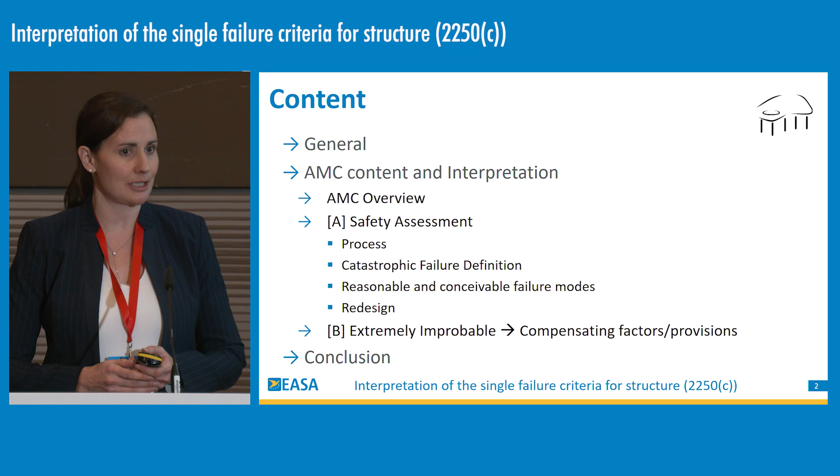I'll start with a general introduction to the requirement itself and the reason behind it, and then introduce the AMC material, giving an overview of the process to show compliance to the requirement. The AMC material is split into two parts. Part A, the main part to show compliance, includes a safety assessment. I will also explain Part B, which asks for an extremely improbable demonstration using compensating factors and provisions, and I'll clarify when Part B can be used. I'll finish with a concluding summary.

As a reminder of the requirement, for category enhanced only, a single failure must not have a catastrophic effect upon the aircraft. This failure is both at aircraft level and occupant level. So if a single failure is unsafe for all the occupants, but the aircraft survives, this is also a catastrophic failure. I also want to highlight that this requirement is a design requirement, and what we want to ensure is the aircraft is designed to be robust against single failures.

We do accept that this is a very challenging requirement. It's a new requirement, not part of CS 23, 27, and 29. But the unique design of the VTOL aircraft makes this objective achievable.

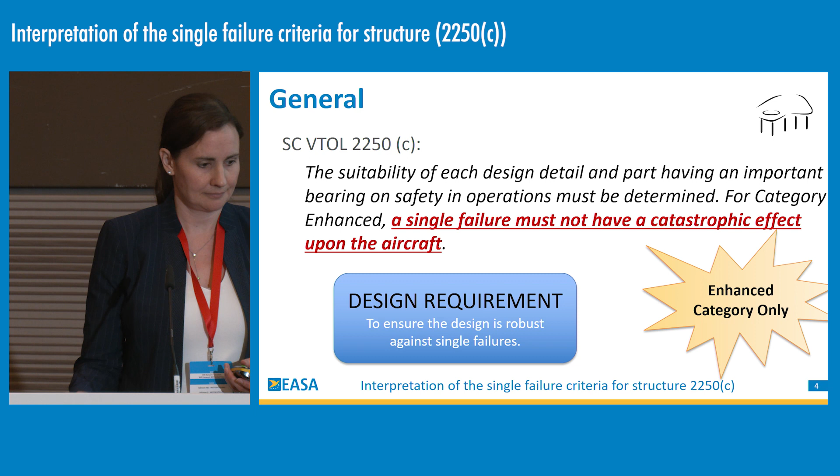Here I show a few examples of the VTOL designs that we covered under the special condition. The key design concept I want to highlight is the use of multiple lift thrust units. Due to these multiple lift thrust units, these VTOL aircraft can be designed to be less sensitive to catastrophic failures, because sufficient segregation and redundancies can be incorporated into the design. This makes our key objective, no single failure leading to catastrophic effect, achievable.

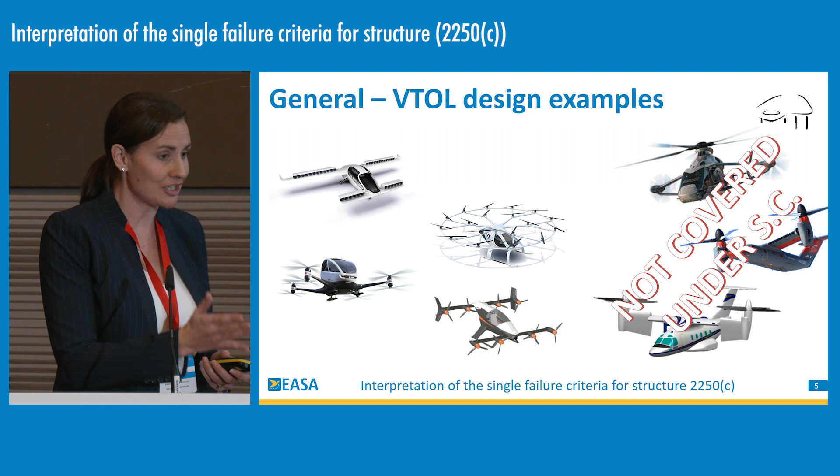As a reminder, the special condition is only applicable to aircraft with more than 2 lift thrust units used for takeoff. The examples on the right-hand side are not covered by the special condition, as it's accepted that meeting this objective would be significantly challenging for these types of aircraft.

In other words, the enhanced VTOL configuration is unique compared to rotorcraft and aircraft. With the multiple lift thrust units, VTOL is less sensitive to catastrophic single failure, provided that sufficient segregation and redundancies are included in the design, the structure, the lift thrust units, and their installation. This is our unique opportunity to make single failure not catastrophic achievable. Even with all the precautions we currently have with CS 27 and 29, unfortunately in service we still have catastrophic events from single failures. This is our chance to design against it.

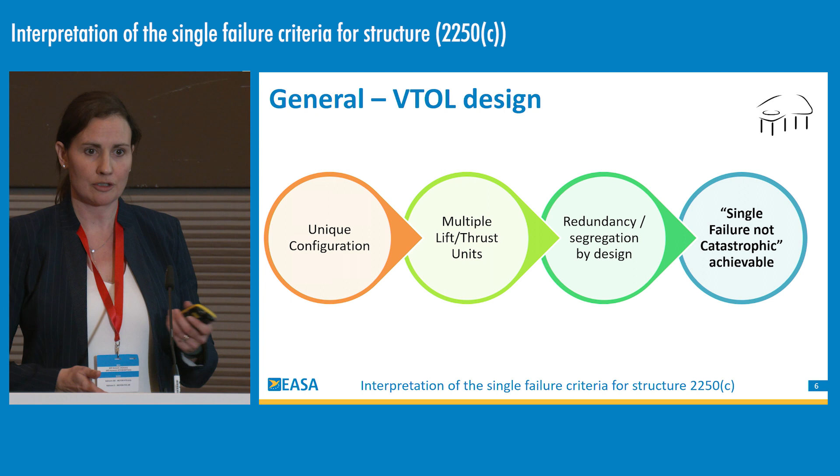So far I've been concentrating on the multiple lift thrust units. Clearly the airframe design is not a new concept compared to rotorcraft. But with the use and consideration of multi-load path and crack or damage arrest features, single failure not catastrophic can also be achieved for the whole of the structure, including the airframe, control system, and lift thrust units.

Now we'll move on to the AMC, the guidance material overview, and our interpretation. On this first slide, I'll just give an overview, but I'll go into more detail on the subsequent slides.

So the process starts with a safety assessment, and this is Part A of the AMC. If the result, when you've considered all reasonable and conceivable failures, is that no single failure would lead to catastrophic consequences, the requirement is met and the objective is met. If this is not achieved, we will request redesign or reconfiguration. And this redesign or reconfiguration loop should be repeated until the objective is met.

However, we do acknowledge in some cases this objective may not be possible to achieve. If the redesign options or reconfigure options are impractical, add excessive complexity, or add additional potentially catastrophic failure modes, we can move to Part B. But Part B will be accepted only on a very limited case-by-case basis. It must be discussed with EASA, agreed with EASA, and documented. Again, I'll give more information later in this presentation.

So the safety assessment process is very standard. Firstly, all the parts to be considered must be identified together with their functions. A functional hazard assessment should identify all the catastrophic failure conditions, taking into account all the foreseeable operating conditions, such as temperature, altitude, vibration, operating limitations. Then an FMEA should consider all the reasonably anticipated failure modes, with the objective to show that no catastrophic consequence results from a single failure. As a reminder, this is a design requirement, so the FHA and the FMEA should be performed during the conceptual and initial design phases of the system and structure, taking into account all potential failure modes so that the proper provisions or redesign can be made to eliminate the catastrophic failures or consequences.

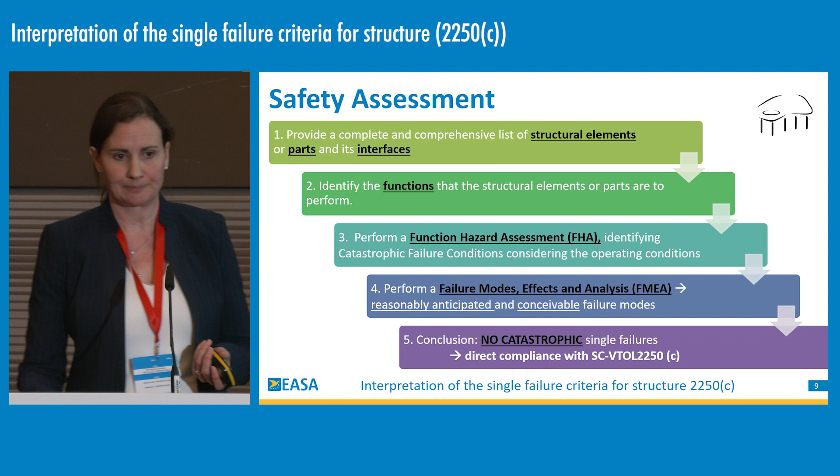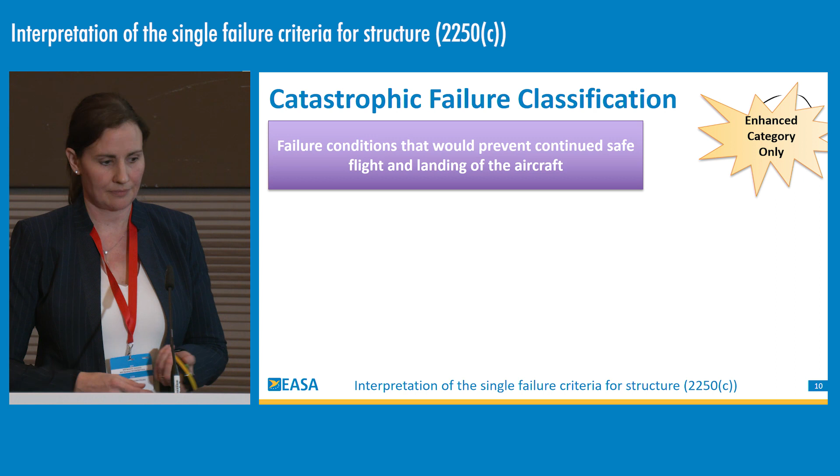So to clarify what a catastrophic failure condition is for this case, for enhanced category only, catastrophic failures are those that would prevent continued safe flight and landing of the aircraft. Not only do you need to consider the residual strength of the remaining components, but you also need to consider other parameters such as flutter, controllability of the aircraft, the fatigue loading on the remaining components following load redistribution to ensure you can continue the flight and land, the resulting vibration levels, and also the functionality and performance of the aircraft following the failure.

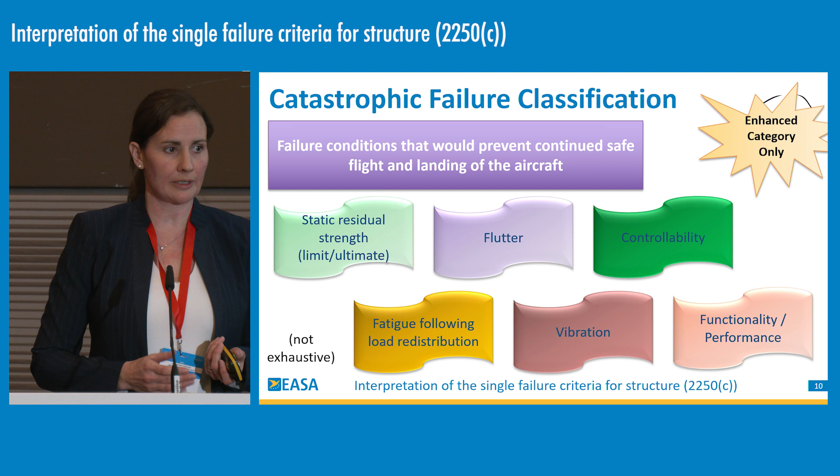So what failures need to be considered? What are reasonable and conceivable failure modes? And I'll try to explain with a few examples. If we take a typical multi-load path structure, for example, a tail boom of a rotorcraft with skin and stringers, should you consider failure of the complete section? Is that reasonable? Well, this depends on your design. If this is a single one-shot piece, all of the same material, with no arrest features, then this potentially could be a reasonable failure and should be included in your safety assessment. Or is there a conceivable single failure of a structure or system near this which could cause complete section failure? Again, if this is the case, it needs to be included.

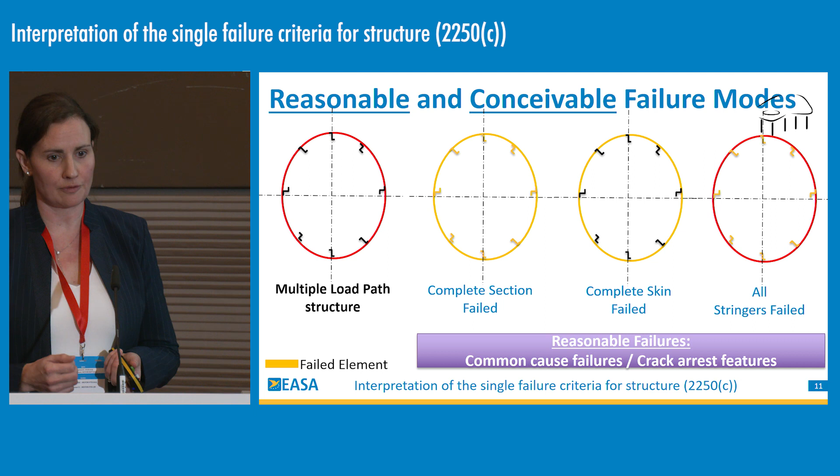We're not going to ask you for unreasonable failures. We're not going to ask you to design against a meteor strike or the part spontaneously disappearing. It's only reasonable failures. So if the complete section failure is not conceivable and reasonable in your design, then the analysis should cascade down to the next structural level, complete skin failure, or all the stringers failed. Again, if the skin is a single part without arrest features, complete skin failure is conceivable and must be considered. Is there a common single failure that could cause all the stringers to fail? Again, this depends on your design and your configuration. In the case of crack arrest features, maybe complete skin failure is not conceivable, and therefore we move down a level again, and only one skin section should be considered. Maybe the result of the previous analysis is that only one stringer failure should be considered.

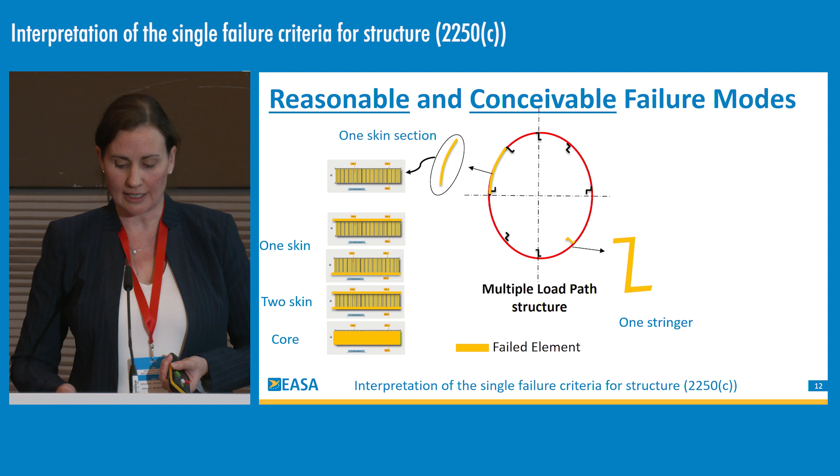For the skin, if we move further down the levels, if the complete skin section is not reasonable, we move down. If it's a sandwich, do you consider one skin, two skins, or the core? The same for the stringer. If complete stringer failure is not reasonable, we move down a level: one flange, the web, two flanges. The failure analysis needs to be carried out at each level and cascaded down for consideration and classification.

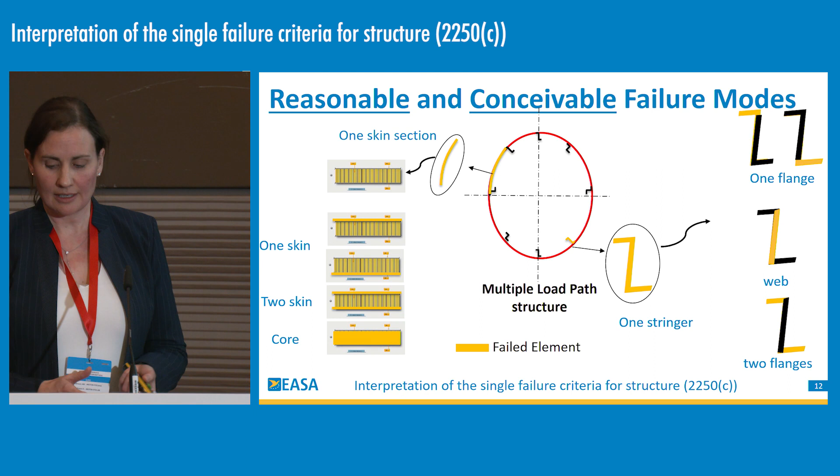For each step, you need to determine if there is a reasonable or conceivable failure mode, or justify why there isn't, and that failure mode shouldn't be considered in the safety assessment. Again, this is all very dependent on your individual design. However, it's a design requirement promoting the use of multi-load path and crack or damage arrest features to avoid single failures leading to catastrophic consequences.

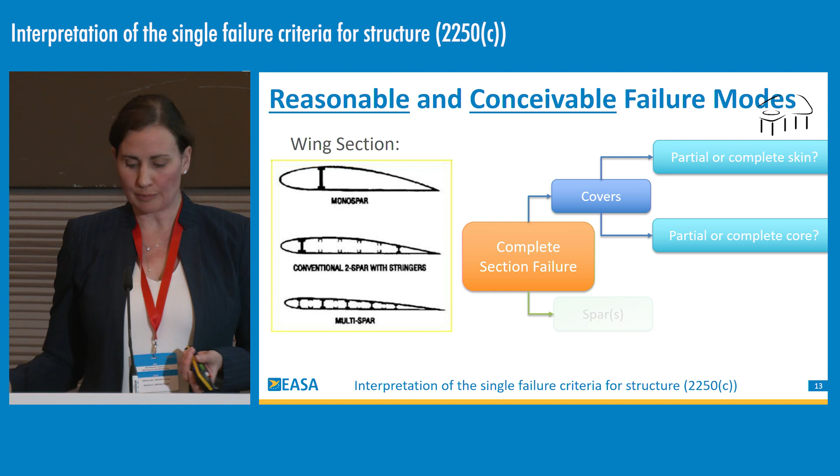Another example is a wing section with either single spar, multi-spar, or two spars. Again, each structural level should be considered. If the wing is single shot with no arrest features, maybe the complete section failure is conceivable and should be included in the safety analysis. Otherwise, should the complete covers be considered, or the complete spar, or all the spars? Again, it depends on your design.

Otherwise, the reasonable failure modes of partial or complete sections of these elements should be included. So again, this is a design requirement. It's promoting the use of multi-load path design and arrest features. And of course, multi-load path design is only successful with inspectability, detectability, and accessibility also by design. Otherwise, the catastrophic failure modes are not going to be avoided.

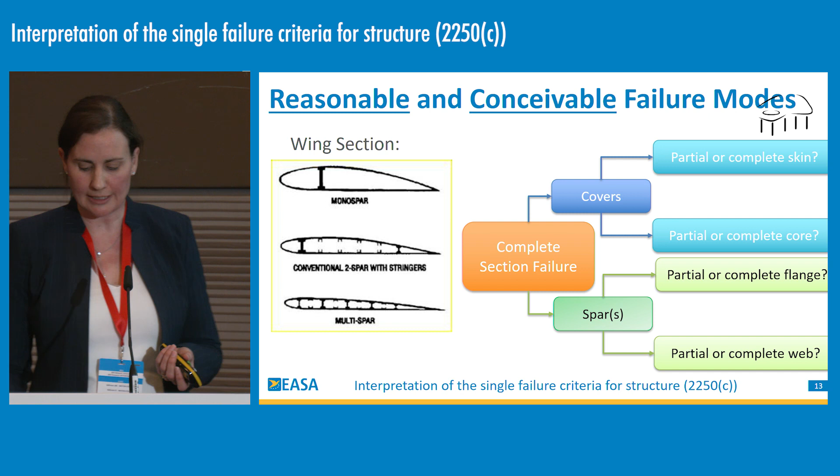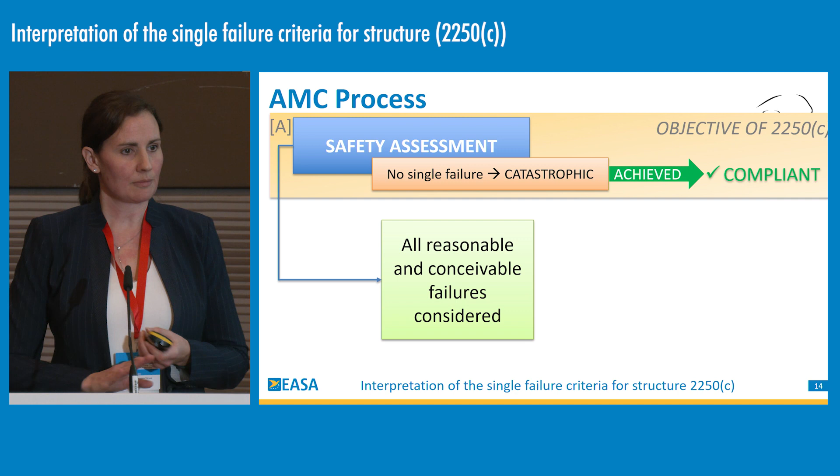So, returning to where we are in the AMC process. Once the safety assessment has been carried out, considering all the reasonable and conceivable failures at all levels of the design, if no single failure is identified, we can stop here. Compliance is shown, the requirement is met. Otherwise, redesign or reconfiguration is requested and should be repeated until no single failure leading to catastrophic consequences is achieved.

So here's an example of a typical single load path component from a rotorcraft. It's a pitch control rod. It's a single element, single load path, possibly no demonstrated residual strength capability or fail-safe capability. Therefore, complete section failure is a conceivable failure and should be included in your safety assessment. This would lead to loss of function, loss of the rotorcraft, potentially catastrophic consequences.

If this single load path design was in a VTOL covered by the special condition, we would ask for redesign or reconfiguration.

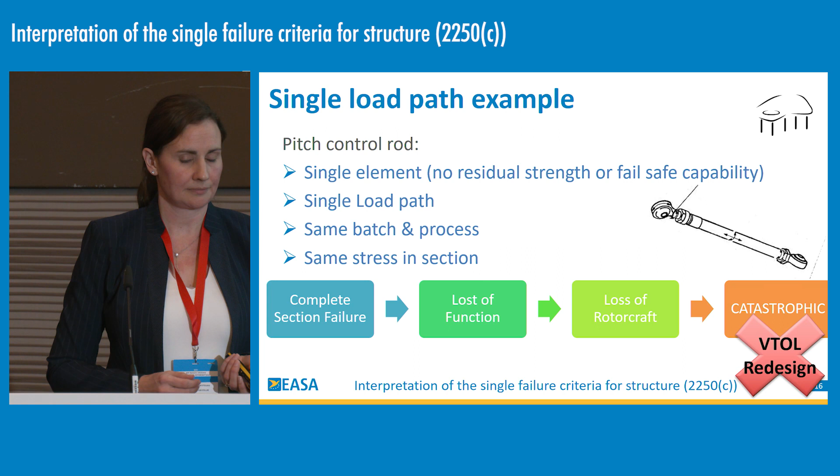Another example are wing fittings with a simple upper and lower lug with a single bolt at the top and a single bolt at the bottom. Potentially the lugs are from the same material, one piece, same batch. In this case, a lug or a bolt failure may not be unreasonable to consider. This would lead to loss of function, loss of the wing, potentially catastrophic consequences, and therefore, if this was included in a design for eVTOL, again we'd ask for redesign or reconfiguration.

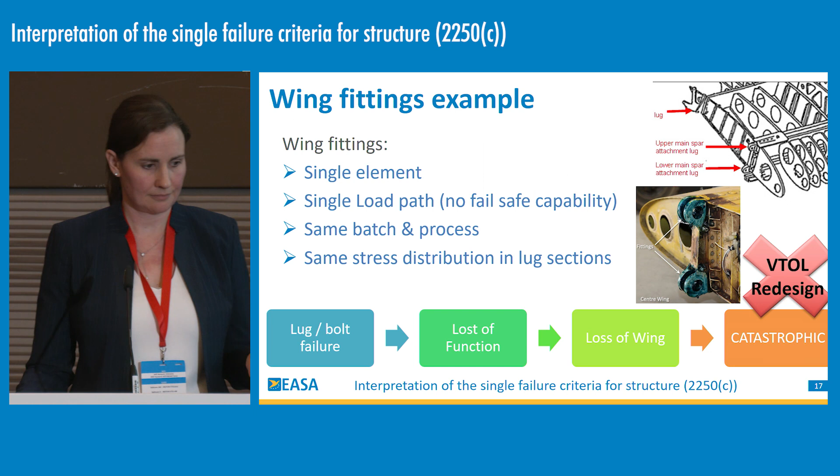So what type of redesign would we look at, or should you be looking at? Continuing on with our wing fitting example, here's a single load path example. You have a single spar with a single lug at the top on each side and a single lug at the bottom on each side, each with a single bolt. The failure of any part of this could be catastrophic, and therefore we ask for redesign.

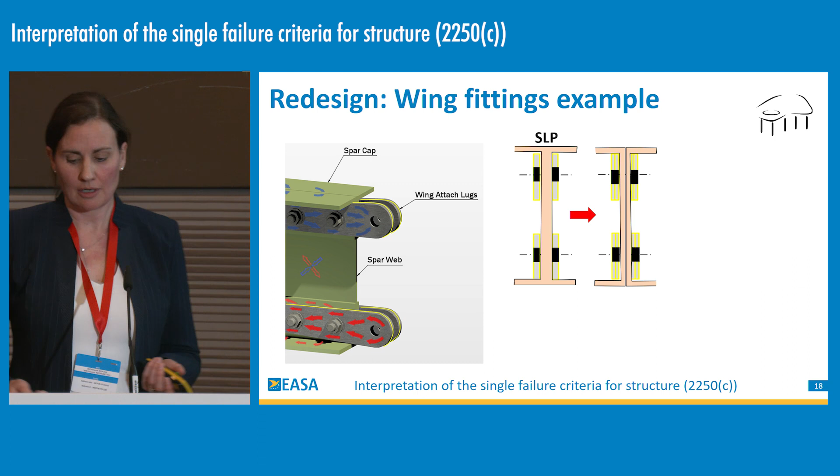An example could be to have two separate spar parts, potentially from a different batch, and maybe with double lugs at the top and bottom. So we're starting to get into multi-load path design. We could even go even further. We have two webs, two independent spar caps at the top, two at the bottom, potentially with the double lugs. Great, we're all happy. This is multi-load path design, single failure is met.

However, in this case, for the multi-load path, the complexity is increased, the part number's increased, and the weight is increased. Also, we acknowledge that the safety may not necessarily be increased due to the increased complexity of detectability of damages and the introduction of additional failure modes that could potentially be catastrophic.

So when you look at your redesign, each of the options have to be carefully analysed and considered. Maybe the best solution for your design is somewhere between single load path and multi-load path examples here. Maybe any redesign would increase the failure modes and complexity to such an extent that the original design is the most robust against single failure.

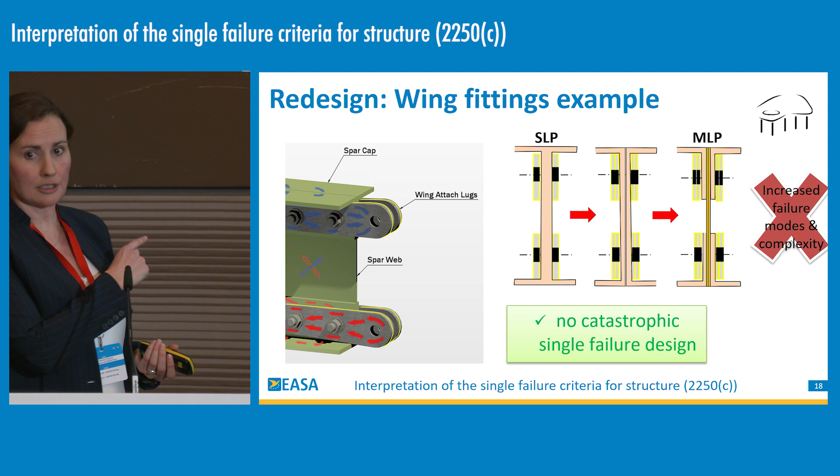Here's another example of a control surface installation or a lift thrust installation with two attachment points. Each of the attachment points are simple lugs with single bolts. The failure of one attachment point is catastrophic, so we're going to ask for redesign.

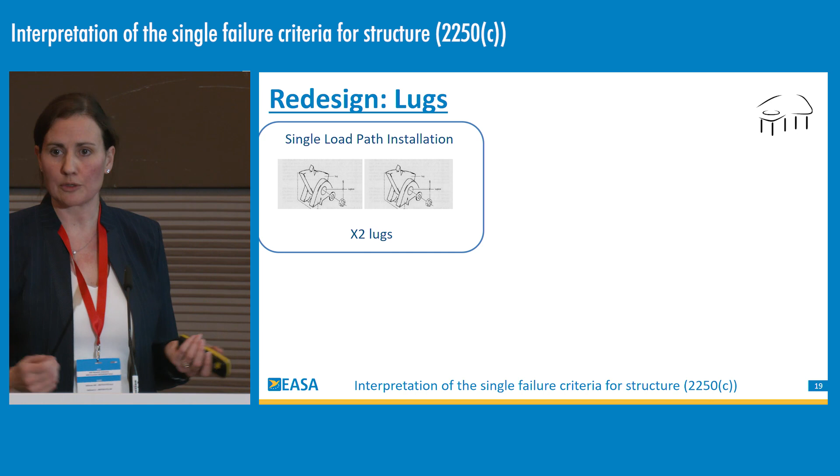What could you consider? Well, a double bolt, for example, or double lugs, each with an independent load path, or a combination of the two. Alternatively, you could go for 3 lugs installation instead of 2. These could be the simple lugs as previous, or with the double pins and bolts and the double lugs.

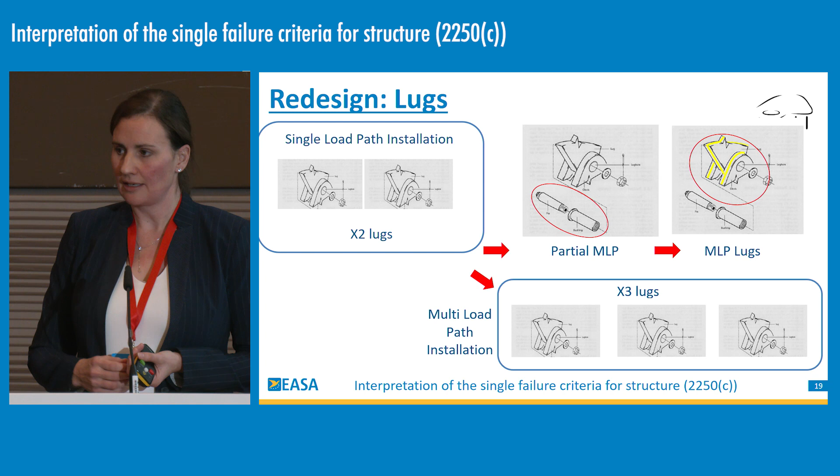The best solution depends on the configuration of the aircraft. One solution may be preferable because it meets the requirement without introducing excessive design complexity and introducing new potentially catastrophic failure modes. It's very important in the redesign that you don't introduce new undetectable failure modes into your design. So the selection of the best solution also depends on inspectability and accessibility.

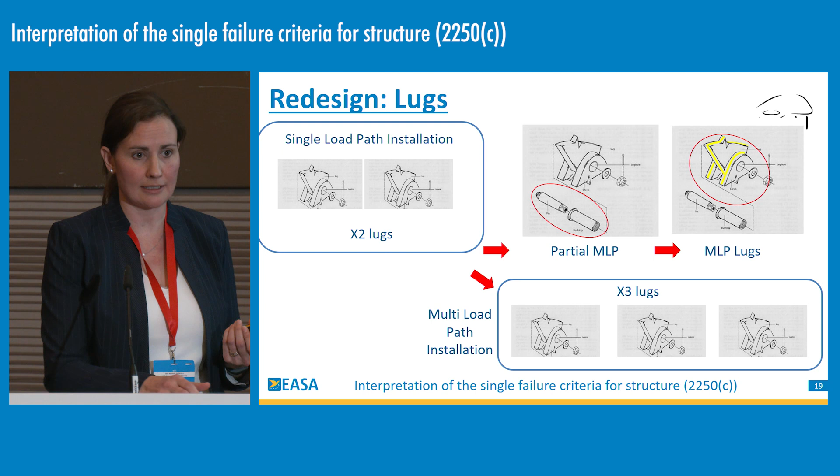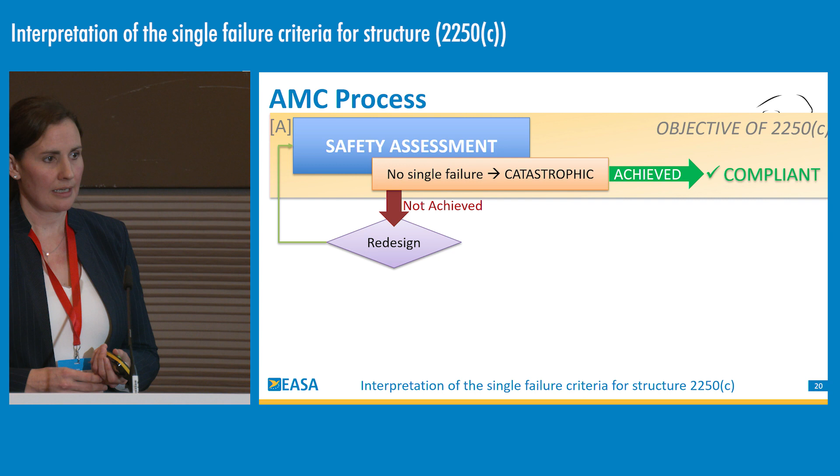It's also possible that the original solution, again, is the most robust against single failures. And this starts introducing Part B of the AMC. So after completing the redesign and reconfiguration loops, it could be that no single failure leading to catastrophic consequences is impractical, adds excessive design complexity, or introduces new potentially catastrophic failure modes.

In this case, we move to Part B. However, this is very limited. It doesn't meet the objective of the requirement and must be considered on a case-by-case basis to be agreed with EASA and to be documented formally.

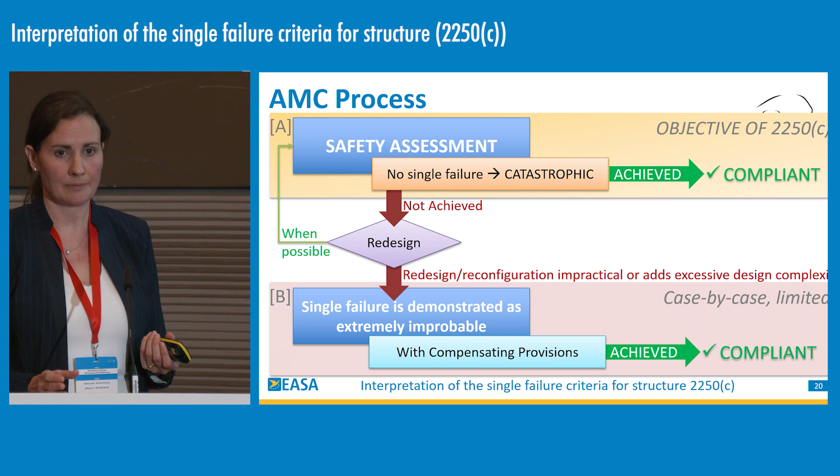This is very similar to what we currently do with CS 27 and 29 for damage tolerance, where damage tolerance is the key objective. However, if it is impractical within the limits of geometry, inspectability, and good design practice, supplemental procedures can be developed. So in this case, we're saying if within the limits of design complexity, inspectability, impracticality, you can use compensating provisions with the objective to demonstrate the single failure that would lead to the catastrophic consequence is extremely improbable, or the catastrophic result is extremely improbable.

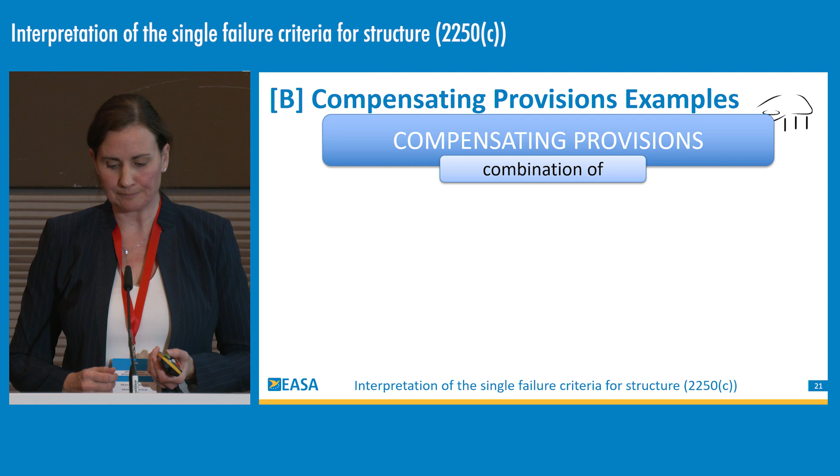So what compensating provisions could you consider for Part B? What we'd ask for is a combination of compensating provisions, not just one. And here are a few examples.

So we have design features, such as the use of higher safety factors, fatigue tolerance, including threat assessment and damage or flaw tolerance, special assembly procedures or functional tests for the avoidance of assembly errors that could be critical, flight limitations to reduce the loading on your part, either to prevent the single failure in the first place or to reduce the loading on the other components so you can achieve the continued safe flight and landing.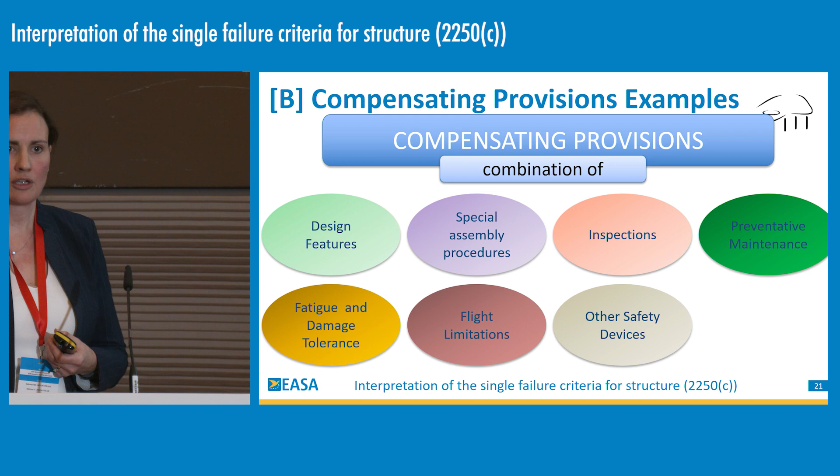Inspections or checks to detect the failure mode or evidence of the conditions that would lead to the failure mode. Preventative maintenance to minimize the likelihood of occurrence of the failure mode, which could include replacement actions or verification of the serviceability of an item which may have a dormant failure mode, or installation of other safety devices.

I want to highlight that the critical parts process CS27/29 is not an acceptable compensating provision. As already highlighted at the beginning of the presentation, unfortunately, even with all the precautions we have from the CS27 and 29 requirements, including critical parts, we still have single failures leading to catastrophic consequences in service.

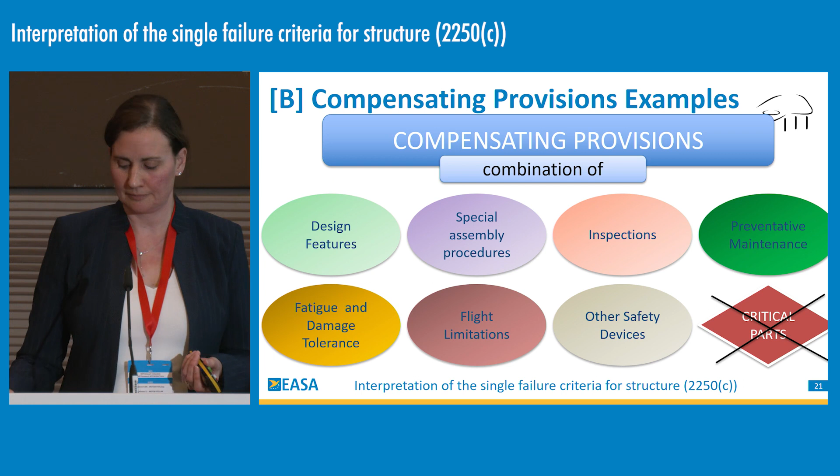So in conclusion, no single failure leading to catastrophic consequences is achievable for VTOL thanks to the multiple lift thrust units and the possibility of having redundancy and segregation in the design. The key objective is to have a design that is robust against single failures.

The AMC describes a process to show compliance, which starts with a safety assessment, considering all the reasonable and conceivable failures. Any catastrophic single failures need to be identified, and redesign or reconfiguration loops carried out.

In the limited case that the objective cannot be met, Part B can be used, which requests a demonstration that the single failures leading to catastrophic consequences are extremely improbable using compensating provisions. And this is how to show compliance to 2250C, the design requirement.

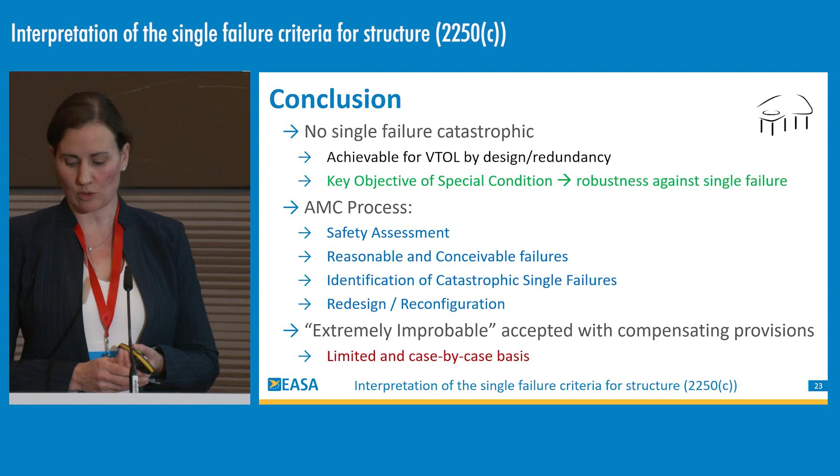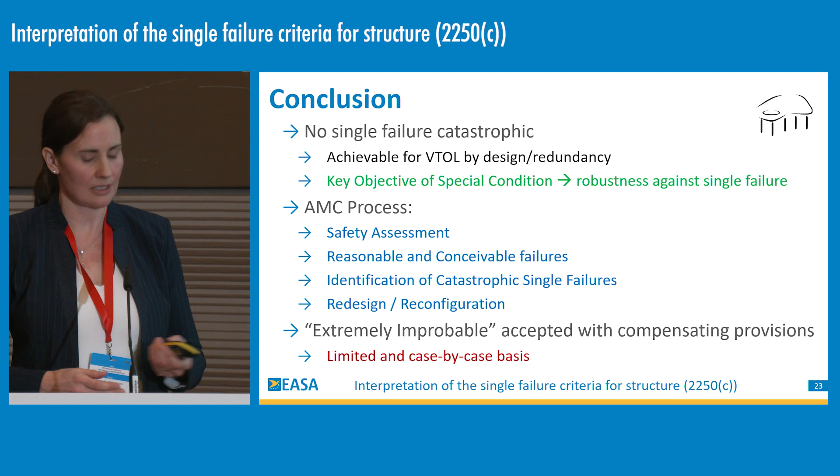Compliance to the structural requirements doesn't end here. This does not exclude the need to consider the other requirements such as flutter, strength, protection of structure, etc. Thank you.